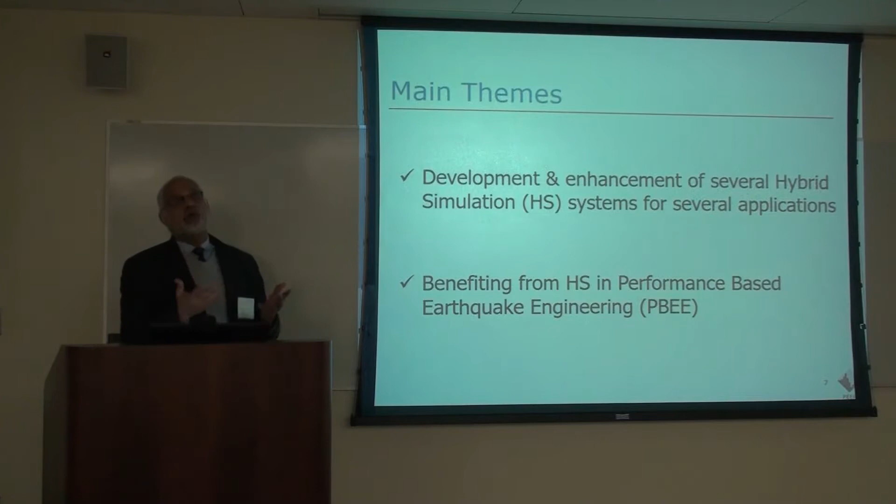And in my role as the director of PEER, as you know, and I'll talk about that a little more during the lunch. So you're going to hear me again during the lunch, but I promise it will be very short, and hopefully it will not make you lose your appetite. And I will focus on talking about PEER and what PEER does. But in a nutshell, we focus on performance-based earthquake engineering. So we try to make use of hybrid simulation in that broader context, and I'll show a couple of slides about that.

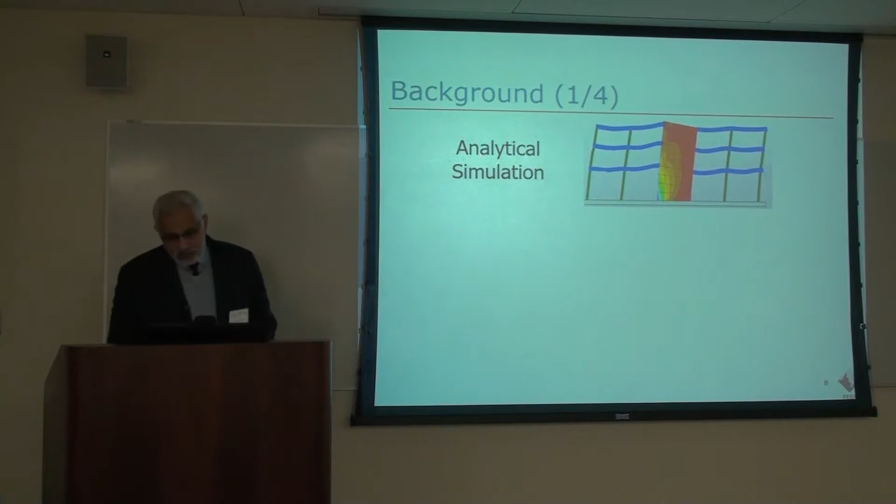So as you all know, hybrid simulation has to do with combining analytical simulation, which could be a finite element model as such, and a few components or elements of this analytical simulation may make sense to put them in a laboratory experiment. So there will be experimental simulation of physical modeling. You put the two together, you have some sort of a hybrid system or hybrid simulation.

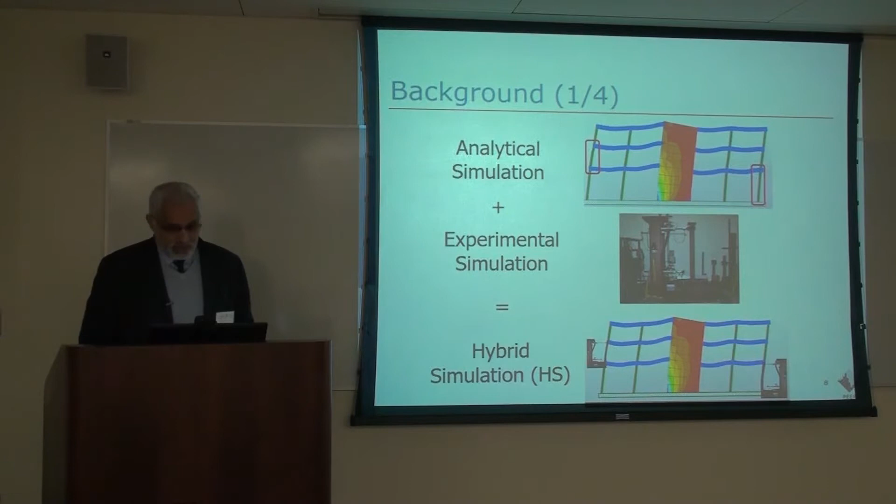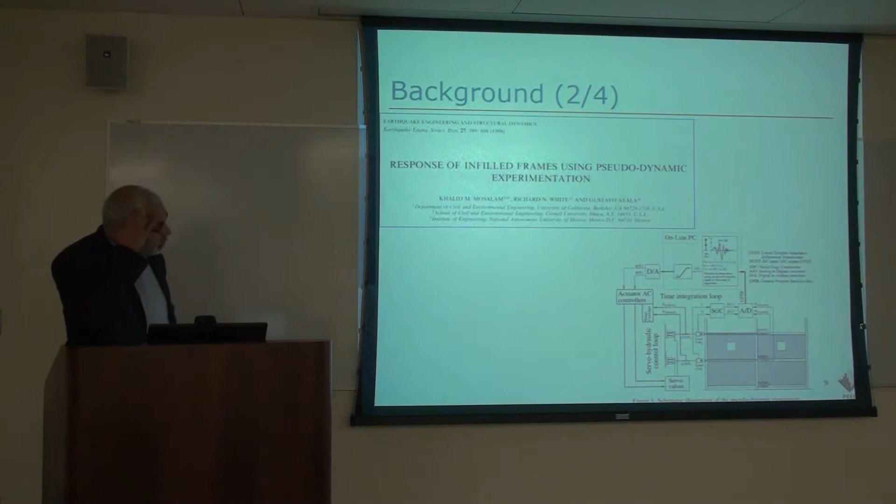So my first encounter to hybrid simulation is this paper I have written back in '98 that came out from work I did while I was still a student at Cornell. Certainly that's many years after Steve Mahin had done a lot of work already in hybrid simulation. So I was learning from all the work that was done here in Berkeley and Japan and in other places. And we looked at this system that has 2 stories. We were wondering, how do we apply lateral load to this system using actuators? Should we put an inverted triangular loading or equal load at each story?

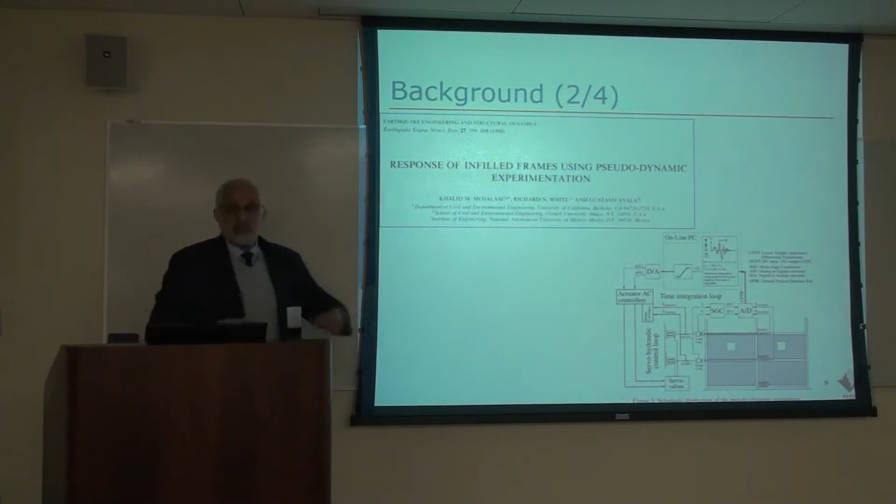Then I ran into this paper I showed you early on. Oh, there is something called pseudodynamic. Oh, we can do some analysis while we do the experiment and let the loading of these 2 actuators be decided based on a computer model that may be just a 2 degree of freedom system, which is something like this. So that's what I'm starting with. And I don't know what's going on here, but something to do with the fonts.

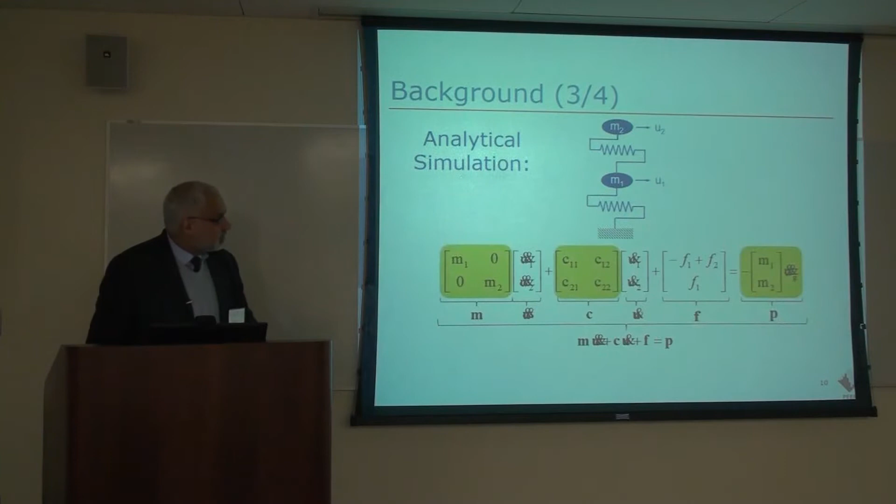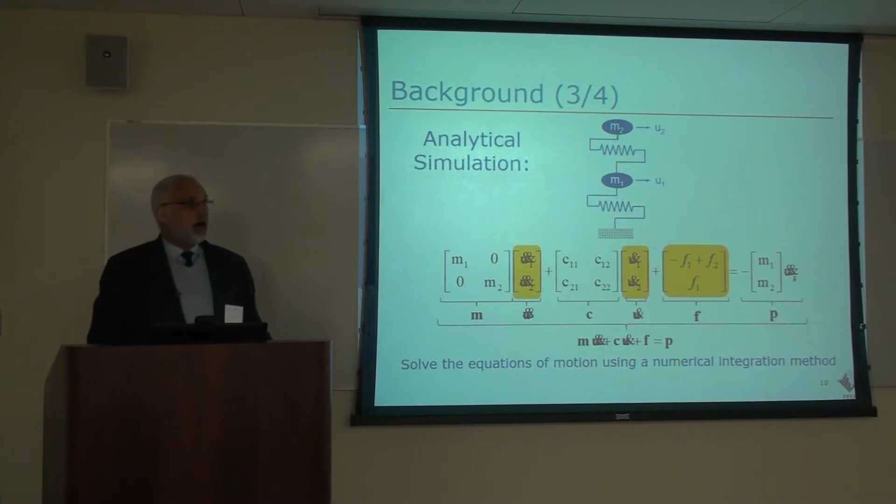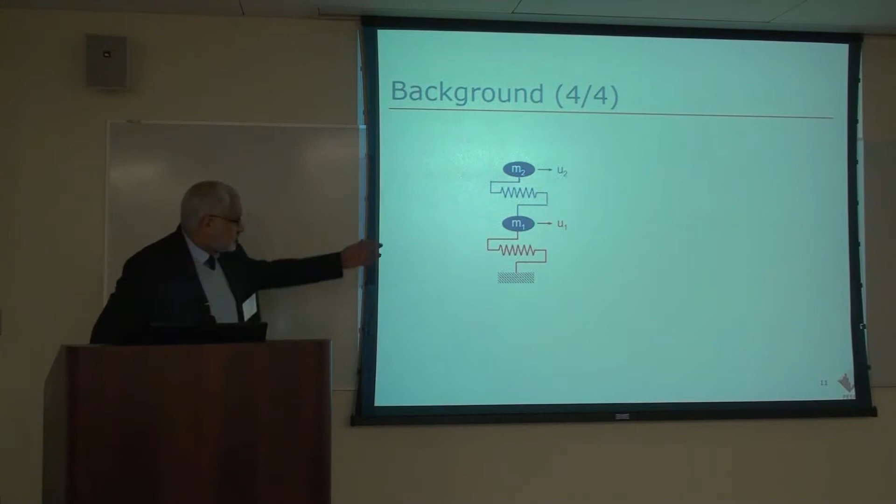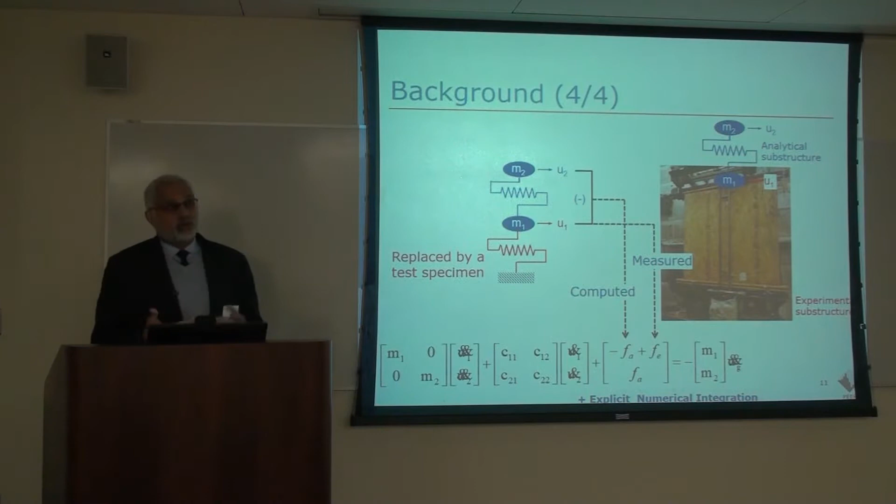But you write your governing equation of motion. Usually these are input to your numerical integrator. Usually these are what you try to compute. And you include some kind of a numerical integrator to integrate these coupled differential equations. But in hybrid simulation, maybe one of those degrees of freedom is a physical model, which is this red spring here. And in that case, you may have a test specimen that may look like this. And then you have the second story as a computer model. Then again, you're still solving the same system of equations, but this restoring force or this force feedback, part of it now is measured and part computed, right?

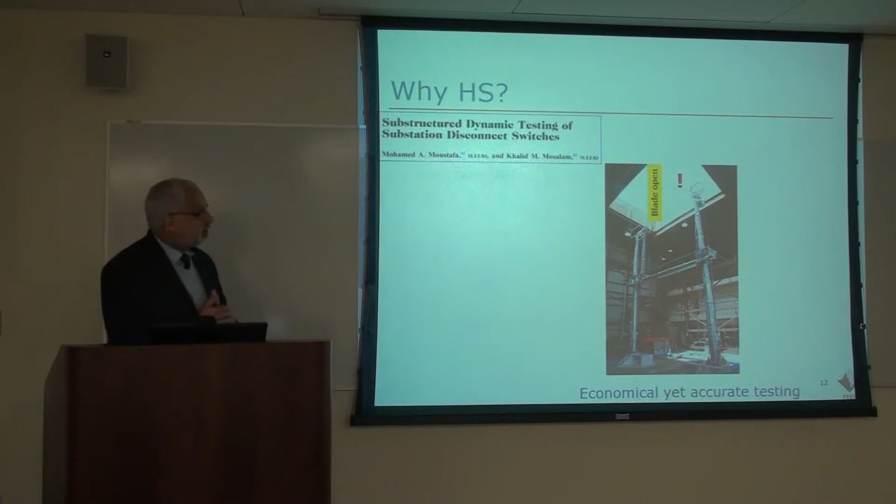So why do we do hybrid simulation? This work, I took only one example that was part of what Professor Moustafa, sitting back there, did when he was doing his master thesis here in Berkeley. And I see this as a good example. We wanted to test this 500 kilovolt electric switch, and it's too big. So either you make a hole in the ceiling of your shake table building and have somebody pay for it. That may cost several thousand dollars to be able to test something that big.

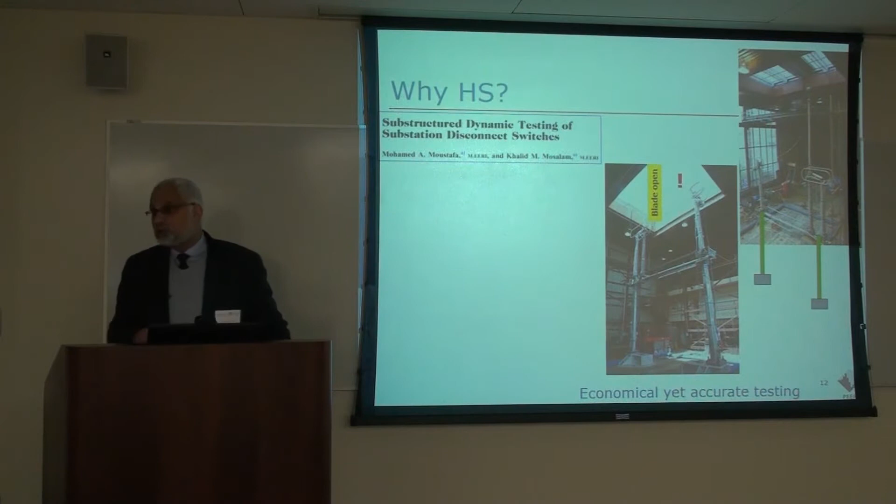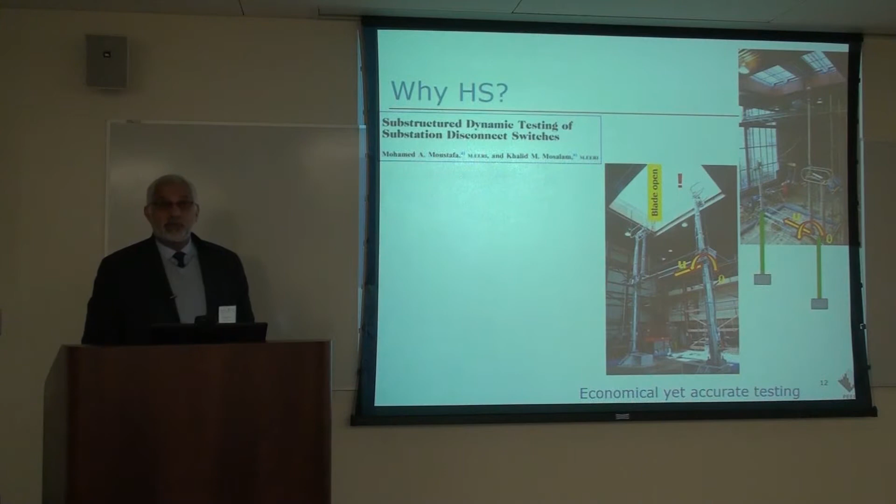Or you say, well, I can actually substructure this. I know how to model a support structure, which is just a steel frame, but the switch sitting on top can actually be brought on the table. And then if you manage to analyze this green frame while testing the switch sitting on the table, maybe you need to apply not just translation, but maybe rotation as well. But given you have a 6 degree of freedom shaking table, and we will see a demo about that tomorrow, I think, right? Yes.

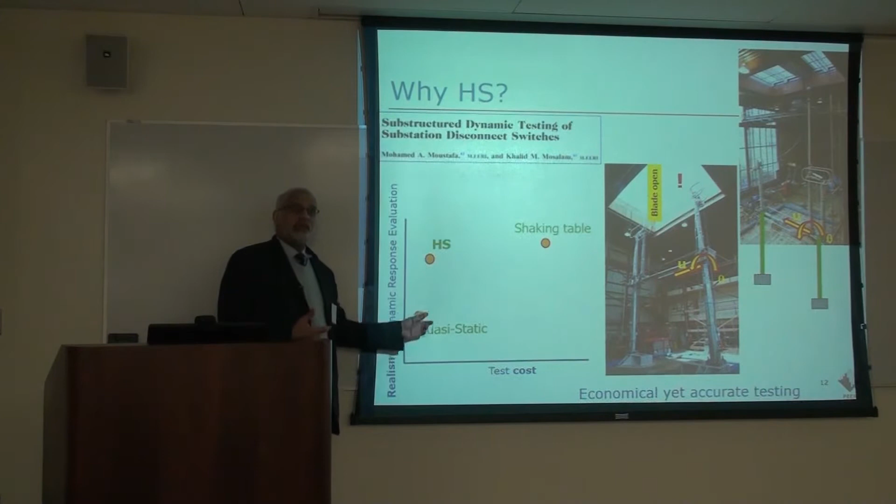So then you can actually achieve the goal of, instead of having unrealistic dynamic representation of the system by doing only quasi-static tests or an expensive shaking table test, you can actually do something in between where you can benefit from these 50 years of development of hybrid simulation that goes back to the early work of Steve Mahin, Masayoshi Nakashima, and others. So that's usually the goal, or one of the goals why we do hybrid.

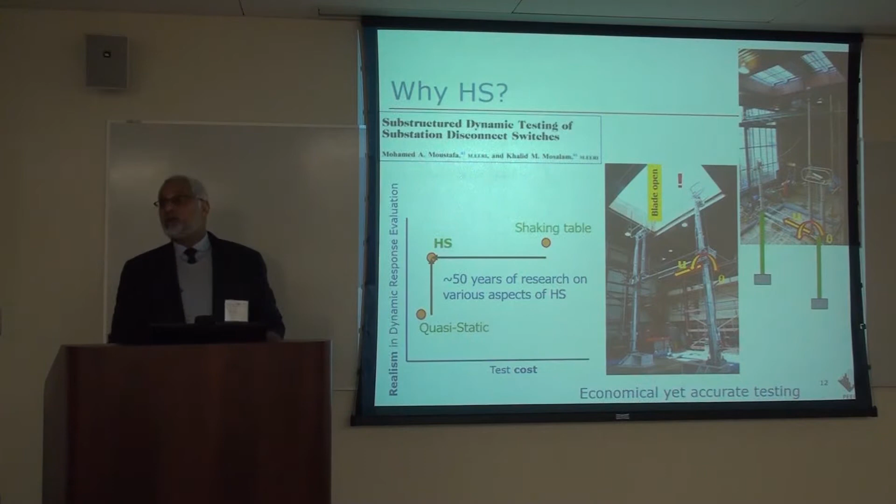There could be other goals. There could be difficulty in simulating physically the mass, or a very large structure that we cannot test, or something you cannot scale down and put on the table. There could be a variety of reasons, but that's one example why we would do hybrid simulation. So what I will show next is basically 6 applications that I was directly involved in over the years. One of them is related to this motivation I just talked about.

When we deal with electric equipment, we have all kinds of electric equipment. If you go to any electric substation, you see many types of these equipment. The class we focused on is some kind of electric equipment that may be made of porcelain or made of polymer that is hard to simulate analytically, and some steel support structure that's relatively easy to simulate analytically. So then it's a perfect problem for substructuring. Clearly the dynamics of the system is affected by the detail of the analytical model. In this case it is the support structure.

To be able to conduct a variety of tests on the shaking table of this system will be very costly, time consuming, and it will be very hard to develop some kind of qualification specs, let's say, unless you have lots of resources, maybe from MTS or from other funding agencies. A couple of other reasons: some of these posts are made of polymer, which requires paying attention to the rate of loading because they are sensitive to the rate of loading, which mandates doing some kind of real-time hybrid testing. And these are distributed mass.

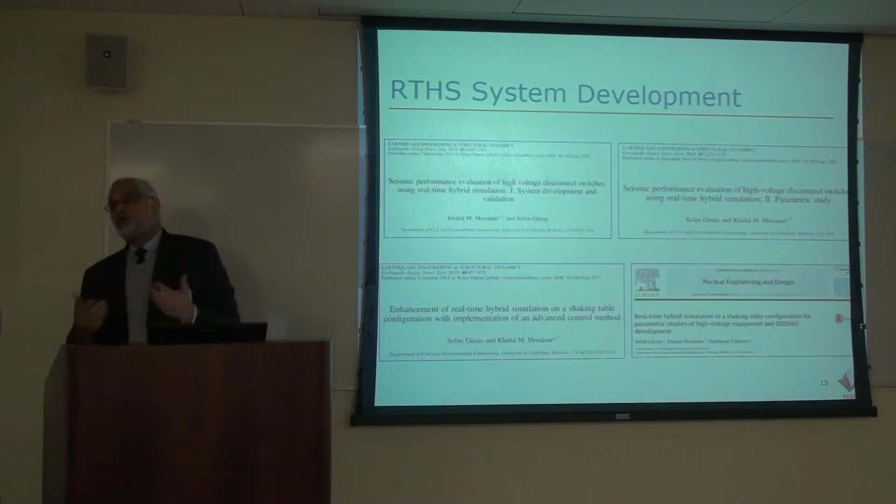I was fortunate enough to work with several people on these, mainly Selim Gunay, who will be talking a lot today and tomorrow, where we try to develop a system that can actually focus on testing these kinds of electric equipment because the need was there. One of the things that he will talk about is the use of three-variable control that's developed by MTS, when we wanted to test a variety of equipment that go from flexible to very stiff, so you cannot just control displacement, maybe you have to worry about controlling velocity and acceleration.

So the early development of this, and it's kind of a good segue into how hybrid systems are put together, is you combine some kind of a data acquisition system with a computational platform, which could be programming your DSP card or having some kind of an interface to MATLAB or some other computational platform. You have a straightforward controller and a little shaking table here that we have on the Berkeley campus.

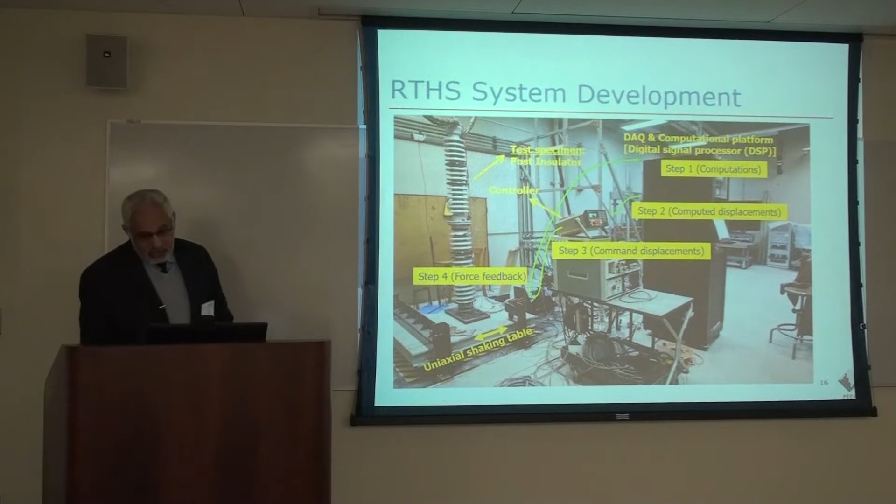So the first step, you do some computation. You pass the computed displacement, in this case, to your controller. You let your controller do its magic. It goes to the actuator that runs the table. You measure the force feedback, and you keep doing that in a loop. The challenge is to be able to do that quickly and efficiently, so maybe 1 millisecond or something, which is your time step where you have to do this loop in a fast way.

And there are so many techniques on how to do this fast and efficiently. It all depends on how big your computational model is. It could be a single degree of freedom, a discrete system of degrees of freedom, or could be even a continuum. So I'll show you a few examples of that.

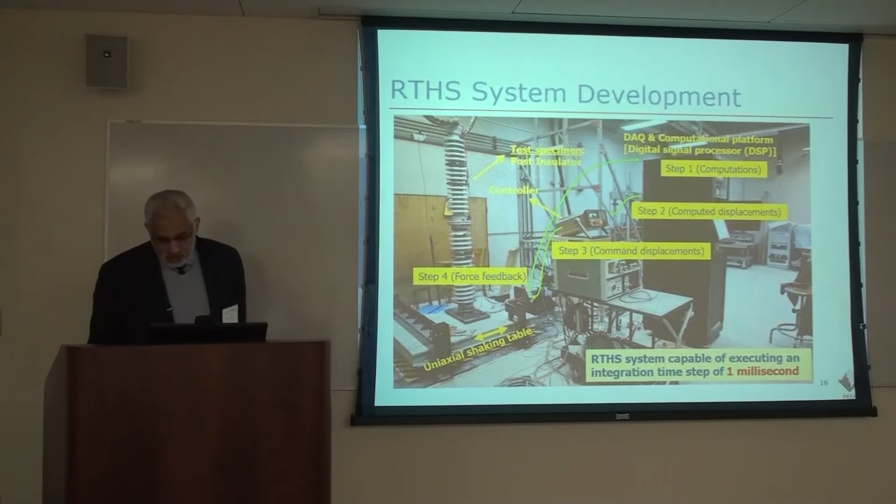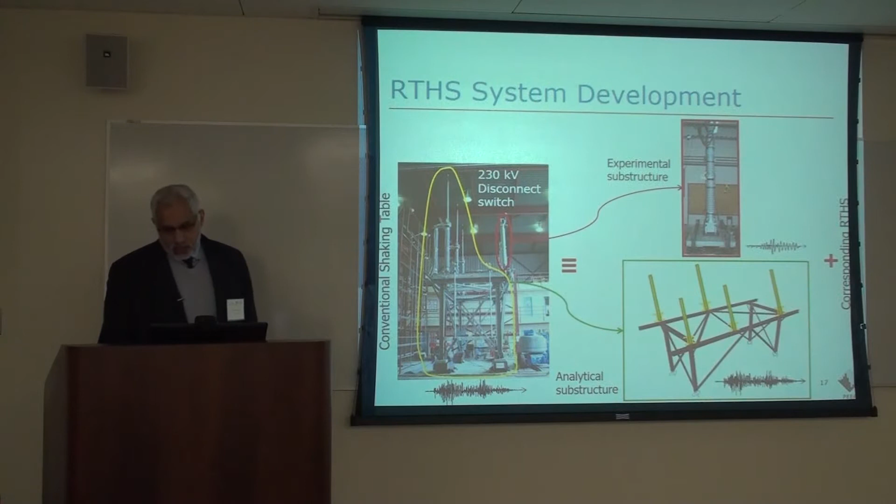So if we go back to the problem we have interest in, looking at this 230 kilovolt switch. So this is a test we did on the shaking table a few years ago, but you can take the support structure, put it in SAP or put it in OpenSees, and you have maybe one of these porcelain insulators sitting on this 1D shaking table, and you make these two talk to each other. You are faced with some delays because your computation cannot be fast enough, so there may be a situation like this.

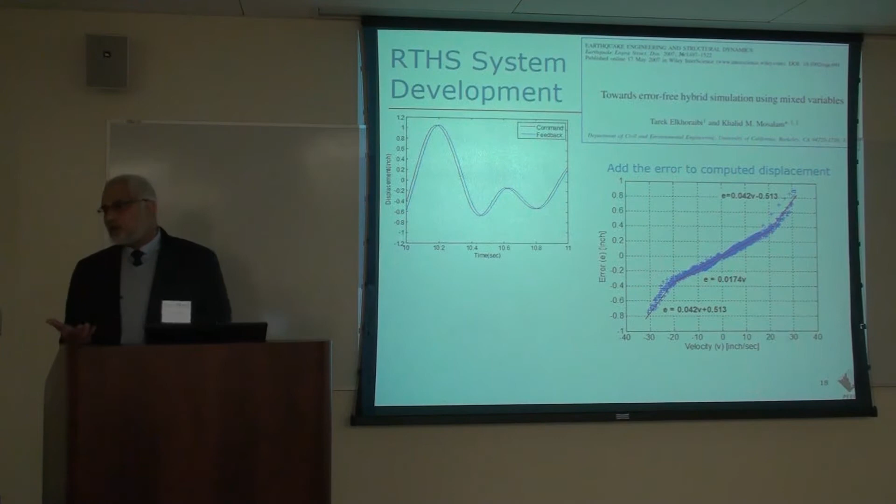We have done some old work on that, and we developed some feed-forward compensator. There are so many other techniques, but here I'm just showing examples I was involved in. This doesn't mean that's the state of the art. There is great work out there. I'm just taking liberty of showing you things I have done myself. Selim also will talk about some recent work we have done in delay compensation.

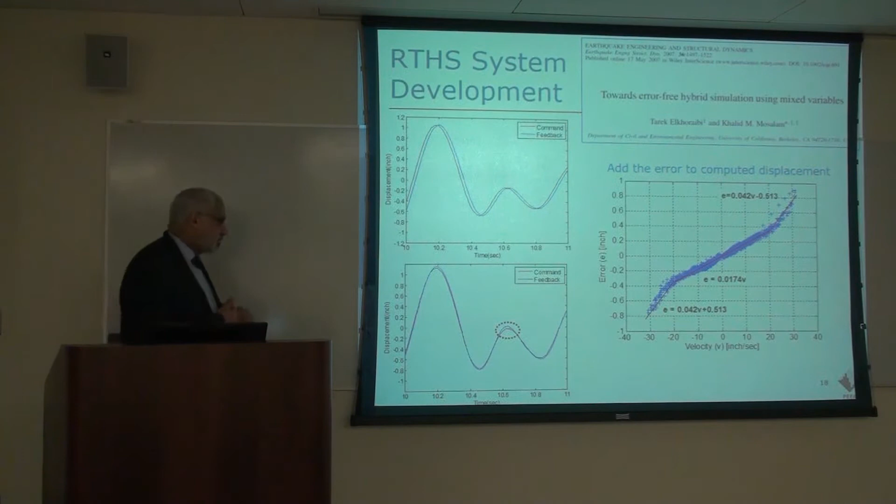This was a very simple compensator where the error is related to the velocity of the actuator. It works very well, however, at the peaks here, at peak displacement, where velocity by definition is 0, you will not have any feed-forward compensation. So the error will persist, but maybe other techniques can take care of that if this was a problem.

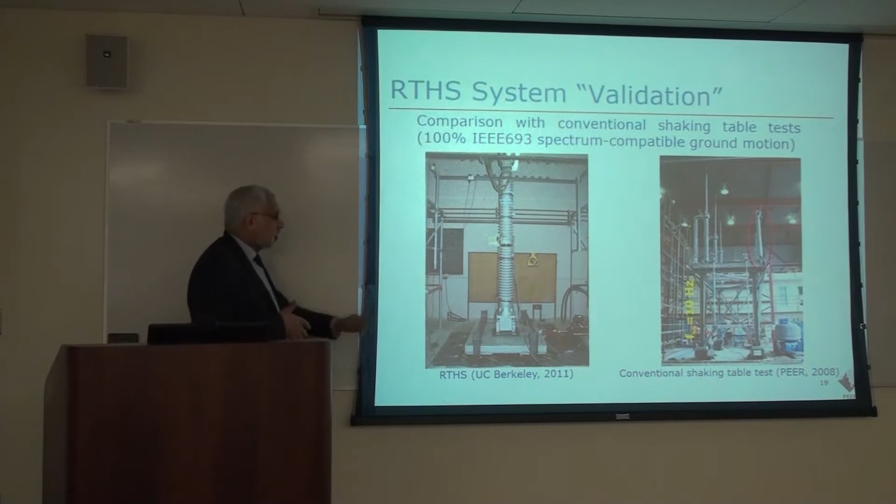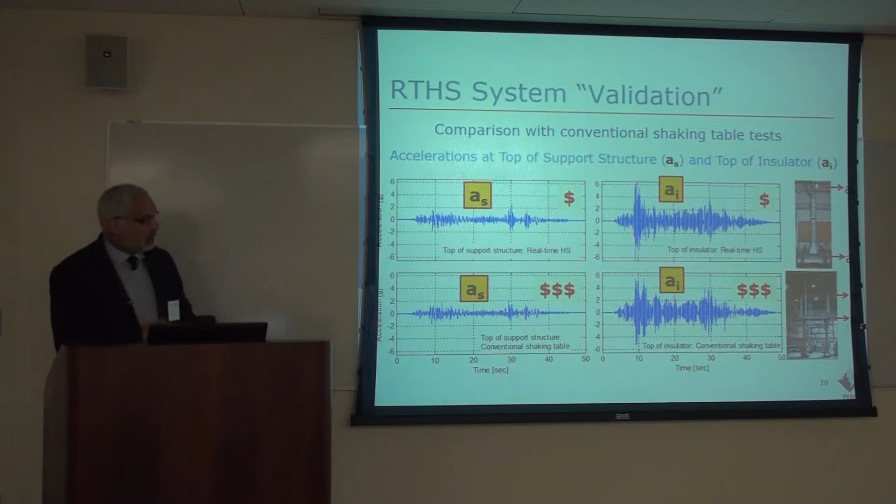Over the years, we have done many validation tests just to gain confidence in these kind of methods. So again, going back to the shake table experiment and its corresponding hybrid simulation version. If you look at this from far, the top two plots here correspond to the hybrid simulation test, which if MTS is going to invest on that, is going to invest very little. But if they want us to do more shake table tests, it's going to be more expensive. And it depends how you weigh.

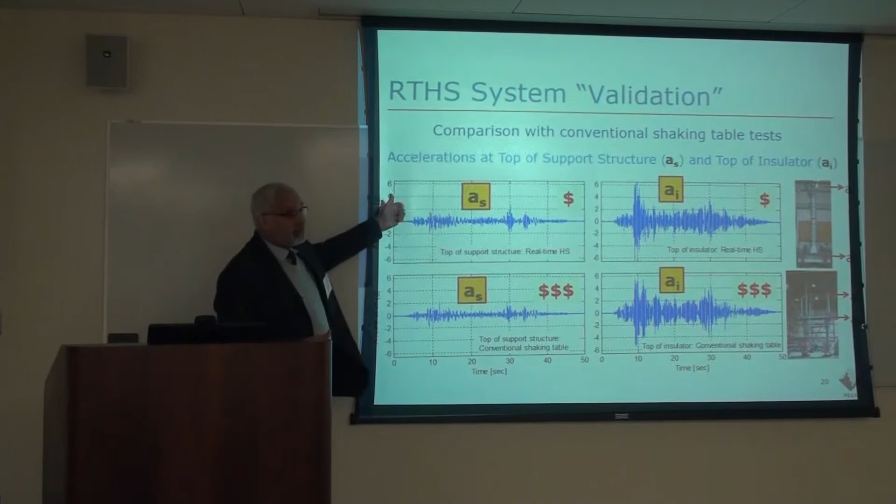If you go back to this first motivation figure, it is the compromise between cost and accuracy. And you may be content that it's good enough if it's done cheaply versus something that's more expensive. One thing that's interesting in these kind of tests is, one would say, well, if you are that good in doing simulation, why don't you just do the whole thing in the computer, right?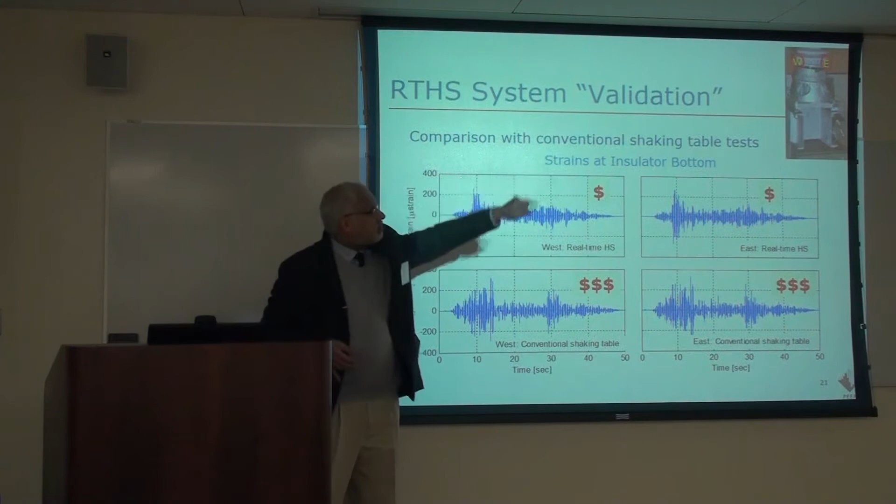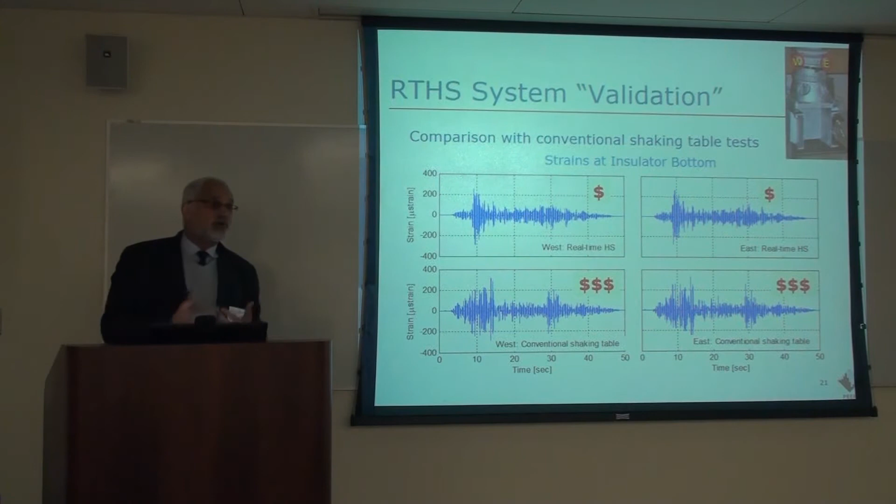Which is certainly possible, but when you look at the base of these posts, it's a highly disturbed region. So if our interest is to look at strains at these locations, as we all know, finite element modeling will not be very accurate in these regions if you're looking at the strain level, because that's what's going to trigger the fracture of this porcelain. So if you are looking at this kind of local measurements, you have no way but to test these details or these critical regions.

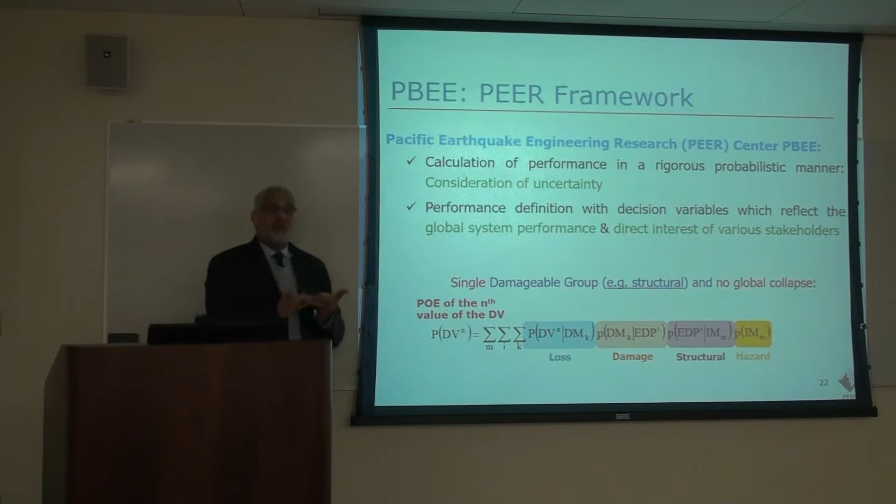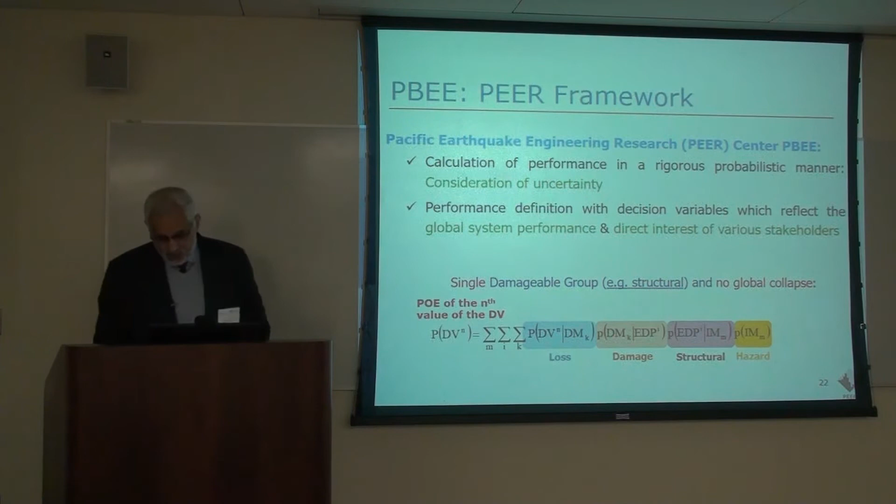So this is great, but now in the bigger context of PEER, where we focus on performance-based earthquake engineering, where we go all the way from hazard to loss estimation, where does hybrid simulation fit in this grand scheme of things? The way we break down the performance-based earthquake engineering framework is to do hazard estimation, structural modeling, damage assessment, and then loss estimation. So hybrid simulation is basically where the structural box comes in. If you don't know how to model something purely in the computer, this is where hybrid simulation can fill in the gap.

So in the larger context of performance-based earthquake engineering, the idea is to go from engineering demand parameters, like peak displacements or peak strains, versus, let's say, varying the stiffness of the support structure. Why can we do that? Because the support structure is modeled in the computer. So it's very easy to put braces or isolation or do whatever. So this is your parameter, just by varying your computational model. And this could be what you measure, whether it's at the connection where you have your strain gauge, or the maximum displacement at the top.

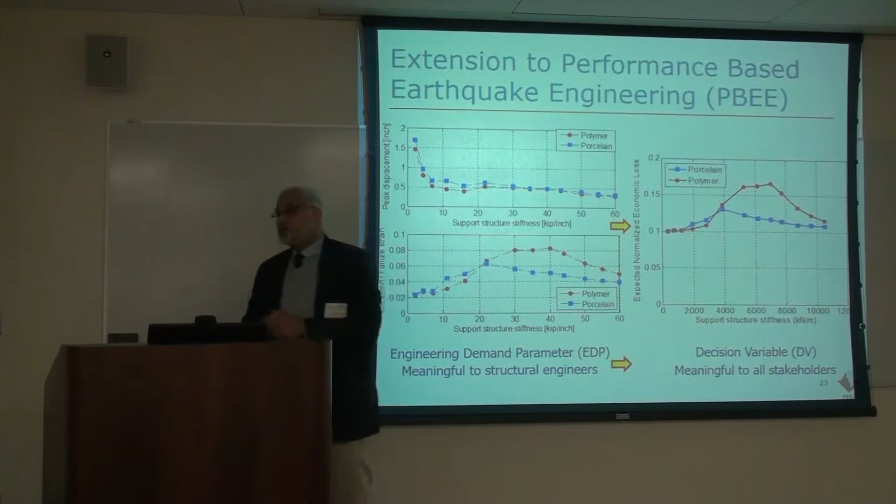So here is a mix of engineering demand parameters that come from a hybrid simulation. The idea at the end of the day is to convert that to some kind of expected losses. So you go back and look at where this equipment is. It sits in an electric substation with a particular hazard for this region. This is a particular substation in San Jose. And you start looking at what leads to losses that this substation may suffer in the event of a magnitude 7 earthquake.

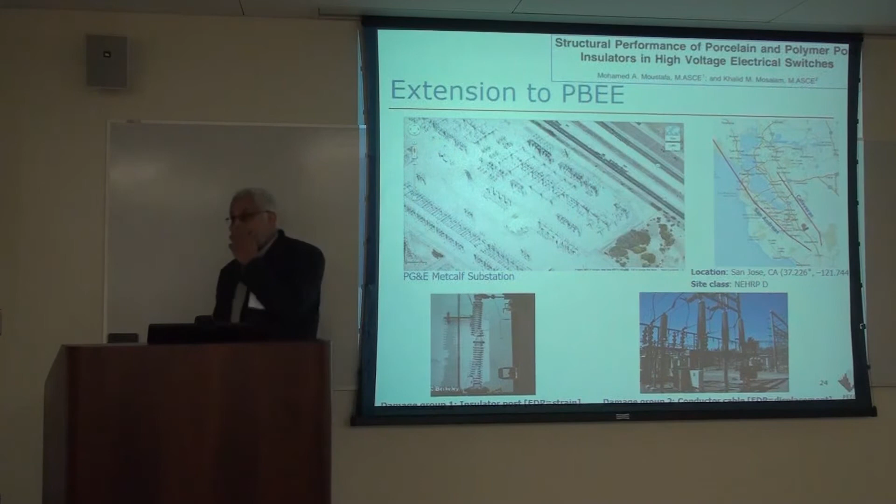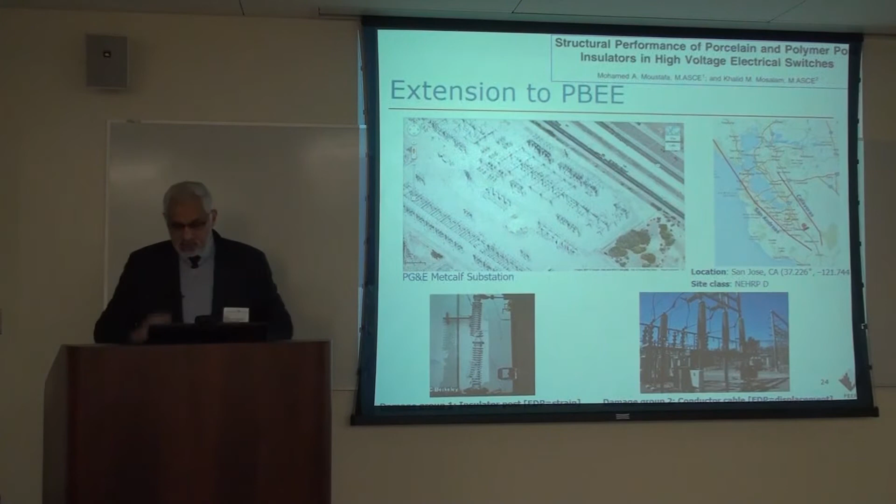So you have two types of losses that may happen. The bus may break because you have lots of deformation at the top of the equipment, or you may have fracture where the whole post may break. So you have two kinds of engineering demand parameters: something related to the strain, because usually fracture is triggered by exceeding some fracture strain, or the deformation where the equipment may start banging against each other.

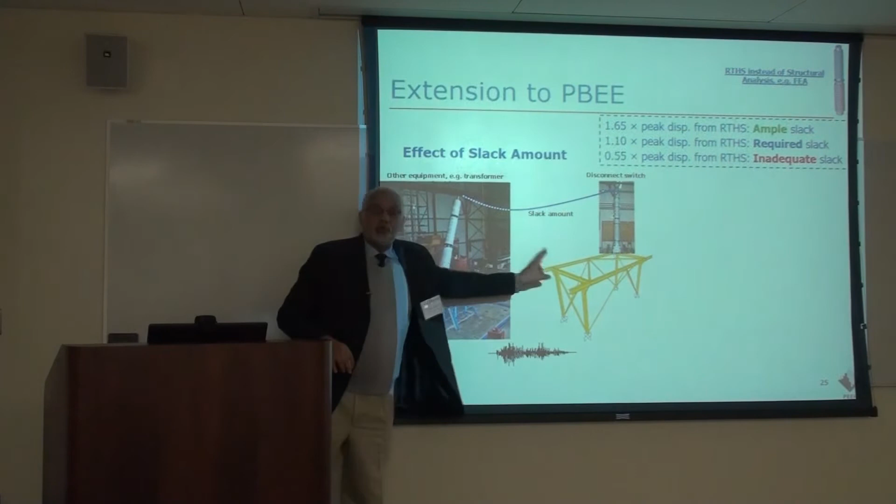So that opened the door to even more use of hybrid simulation. You may be able to model two pieces of equipment with the conductor bus as either a physical specimen or a computational specimen, and you can start looking at design parameters, telling the designer of this substation how much slack of the conductor cable between the equipment you need.

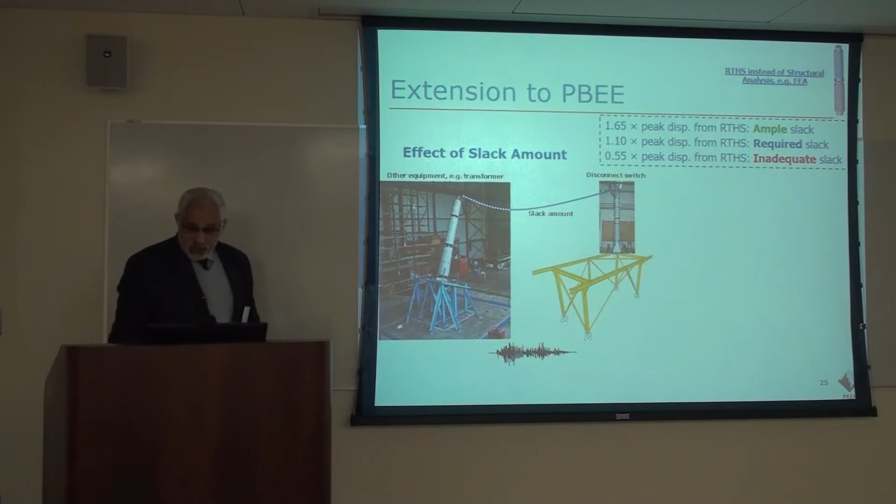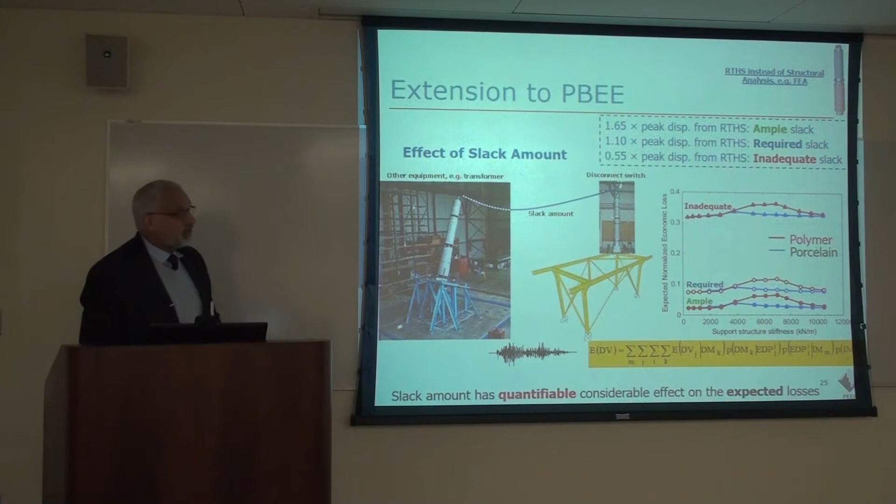So there is a variety of results you can get, like for inadequate or required or ample slack. You have different types of losses, and you can design your system as such. So I'll go very quickly.

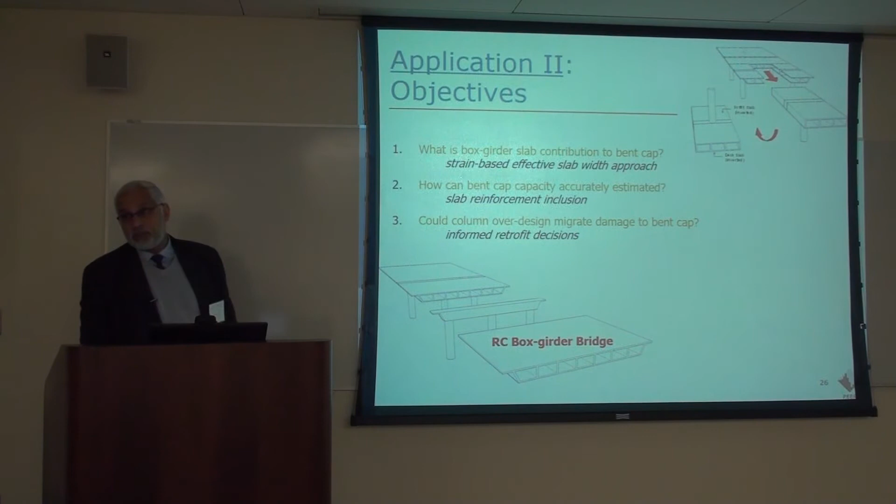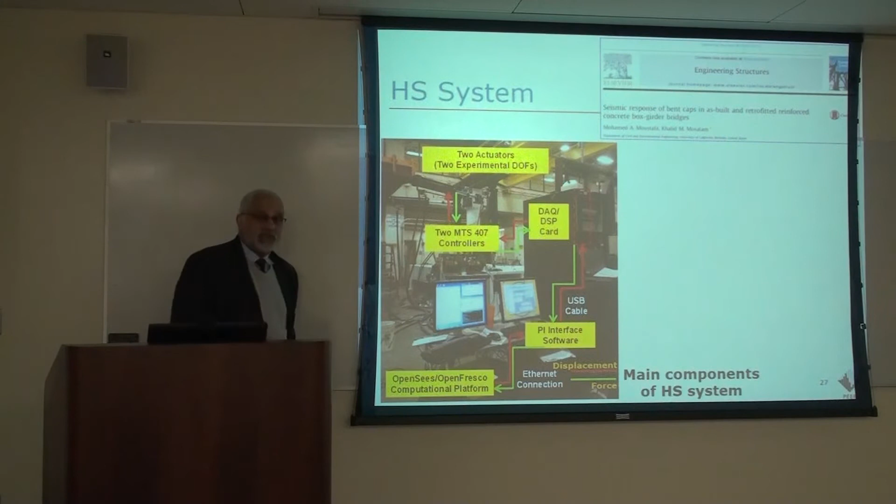Here is an example of using hybrid simulation for a box girder system. That was the work of Professor Moustafa back there on his PhD, when we wanted to look at these kinds of systems, and we had to develop a system that makes use of the combination of OpenSees and OpenFresco, and you will hear more about that, such that this system can be developed and deal with these kinds of problems.

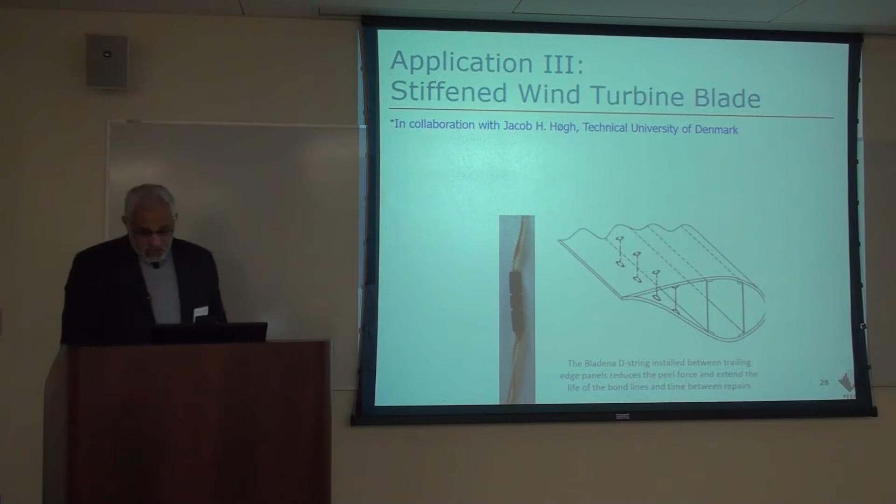We also had a study that looked at turbine blades. In a turbine blade, you have the blade and then you have a stiffener. And people were interested to look at the influence of this stiffener in the tearing of the edge of the blade. So this is a perfect problem for hybrid simulation, because basically you can model the blade in a computer,

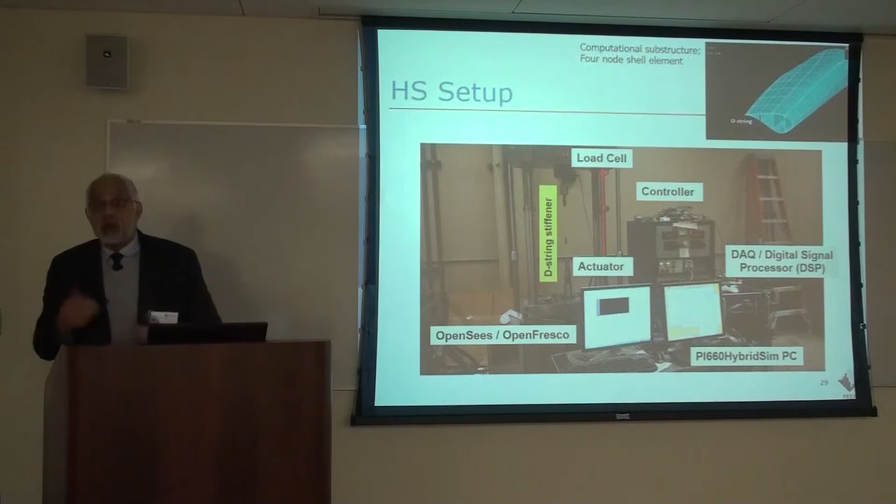you can use ANSYS or whatever, and just the stiffener is tested physically, because the stiffener is made of viscoelastic material. Maybe it's not easy, maybe it's even proprietary, and the manufacturer will not give you the properties of this. But they are willing to give you a piece to test. So you just put it in a hybrid system, you make it interact with your computational model. You can do similar things. Let me just go quickly here.

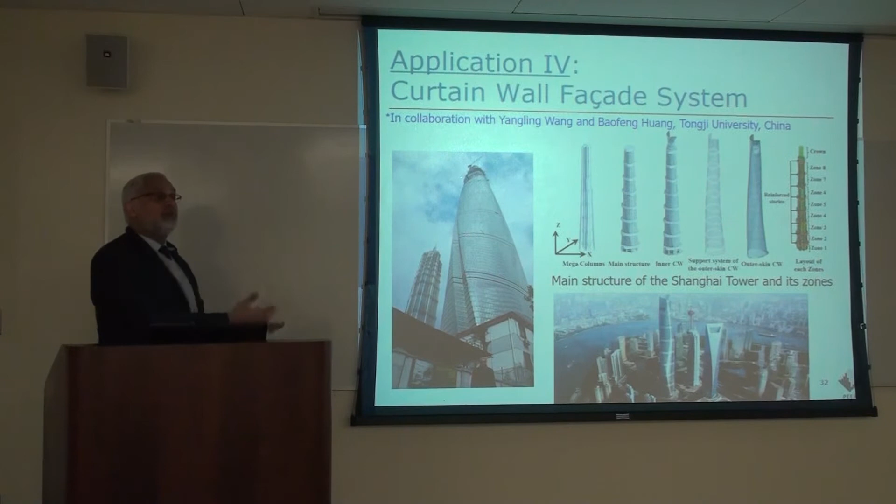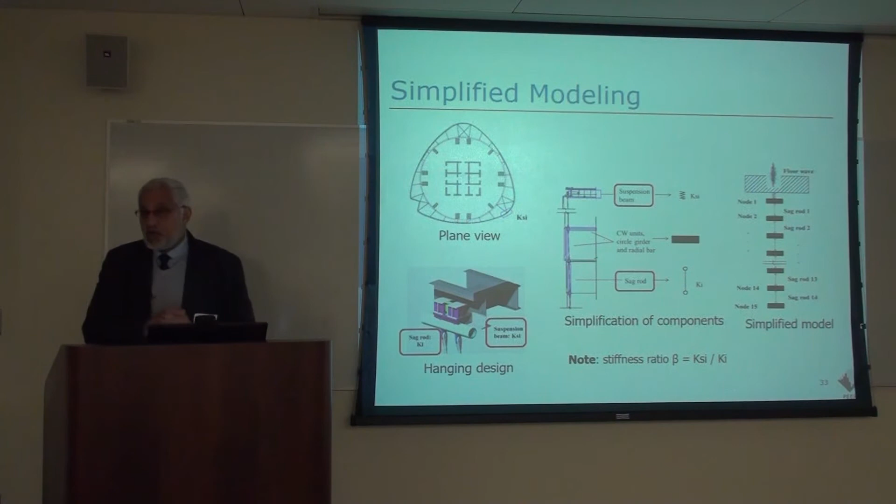This is a project we had in China that was looking at the curtain wall of the Shanghai Tower. The Shanghai Tower curtain wall system is a very interesting system. It consists of very large glass panels hung by cables. And if we want to test the safety of this system, we can think of the glass as being simulated in the computer, while the cabling system, similar to the stiffener of the turbine blade, is tested physically using the same kind of hybrid system.

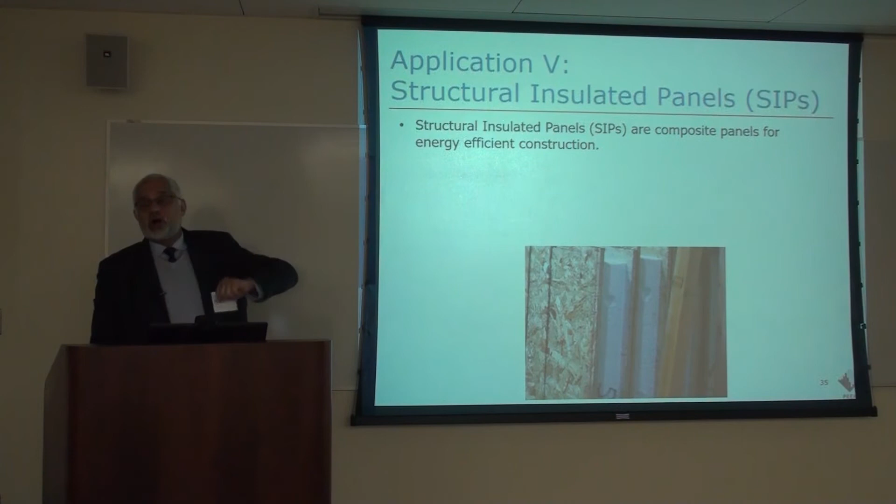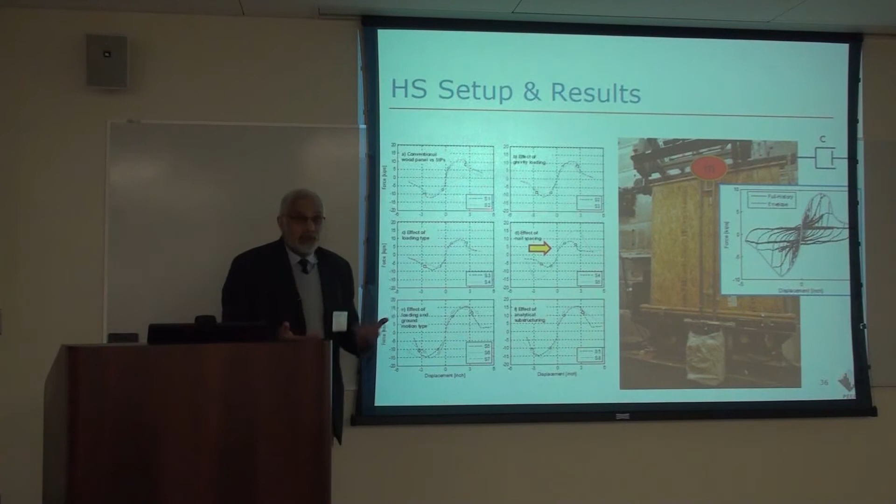You can also look at structural insulated panels. That's actually the first example I showed you where we have this 2 degrees of freedom, where this panel is made of a skin with styrofoam in the middle that may not be suitable for computer modeling, but maybe a 2-story system. The second story is modeled in the computer, the first story is tested in the lab. So we also had this kind of system, and you can vary a variety of things where you study the problem with realistic loading that comes from the hybrid simulation.

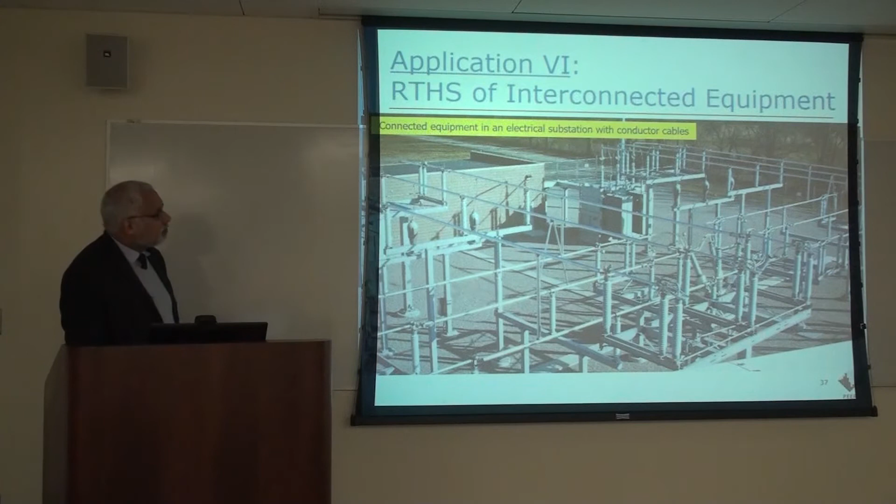Going back, this is the last example here, going back to this interconnected equipment. Why this is important as a last example: because this substation during earthquakes may suffer something like this, and we can only speculate that one piece of equipment failed and then started pulling on the rest, right? So you really need to study the problem in a holistic way.

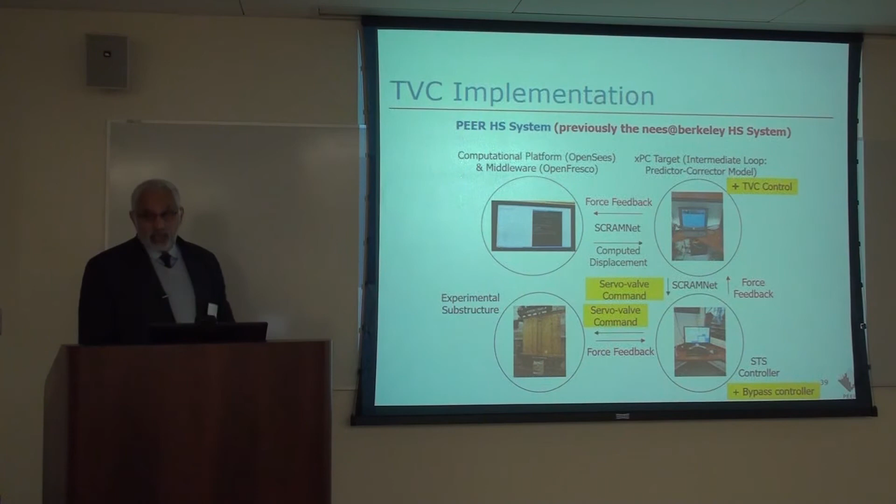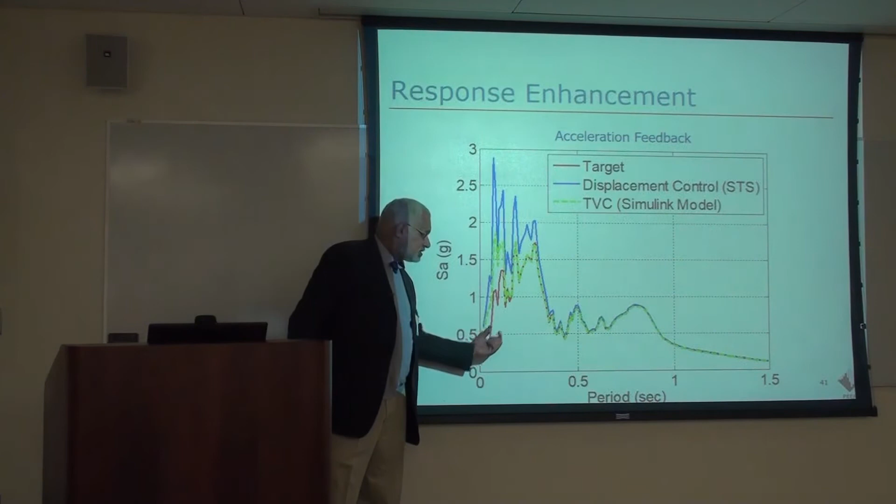This is the system we had for NEES at Berkeley a few years ago, and we will hear more about the inclusion of the 3-variable control in the context of hybrid simulation later, because we were interested not only in the high frequency or the low frequency, but somewhere between the two. In this range, because we wanted to test a system like this where you have 2 shaking tables connected by a conductor cable, and underneath each of these equipment you have a different support structure.

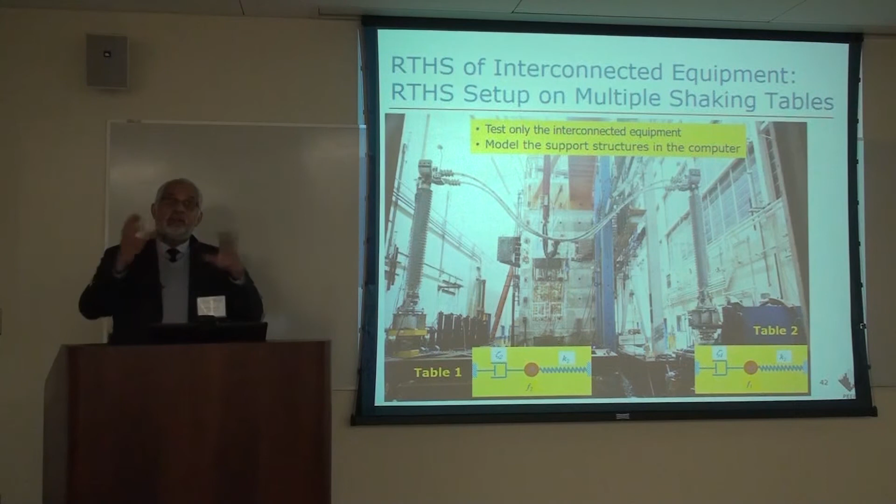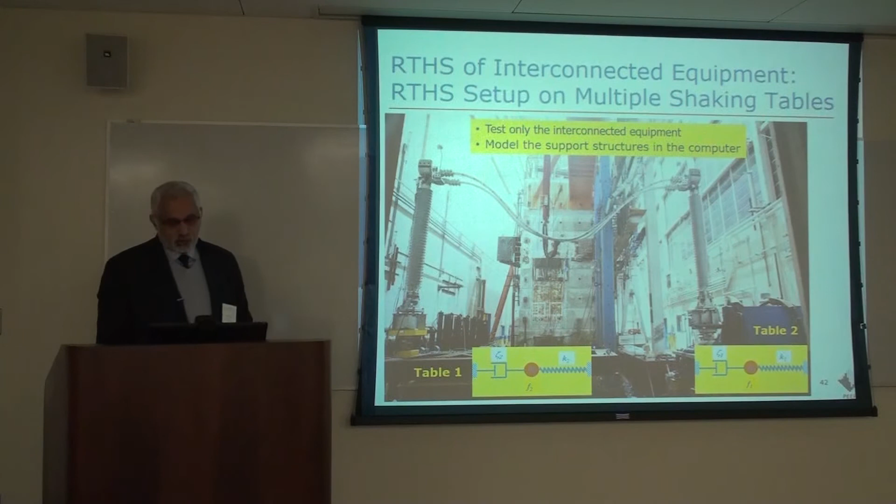First, why do we need 2 tables? Because the support structures are different. Even if the ground motion is the same, the amplification will be different. And then some of these equipment are very stiff, some are flexible, so you need a very advanced controller to do that. And you can get interesting results that you can use.

Just a few slides about future directions, very quickly. One is the theory. We have done some work on that, where you go back to basics and say, well, what are we really doing? We have a domain that we decompose. Half of it goes to the computer, the other half goes to the lab. What happens at the interface? So we have been studying this problem, but we haven't gone far enough. So I see a future in this direction.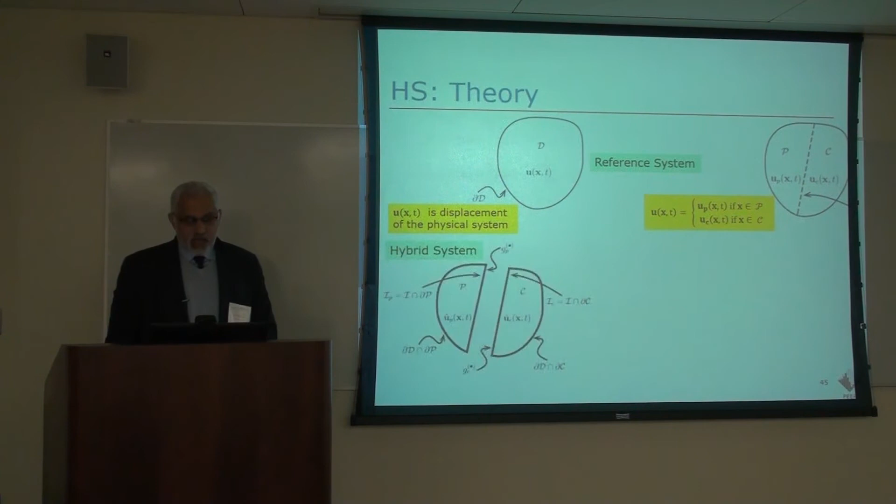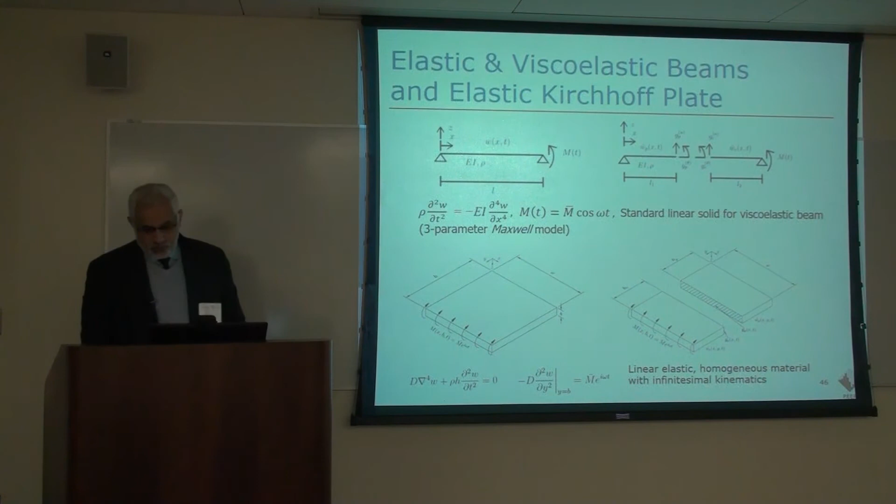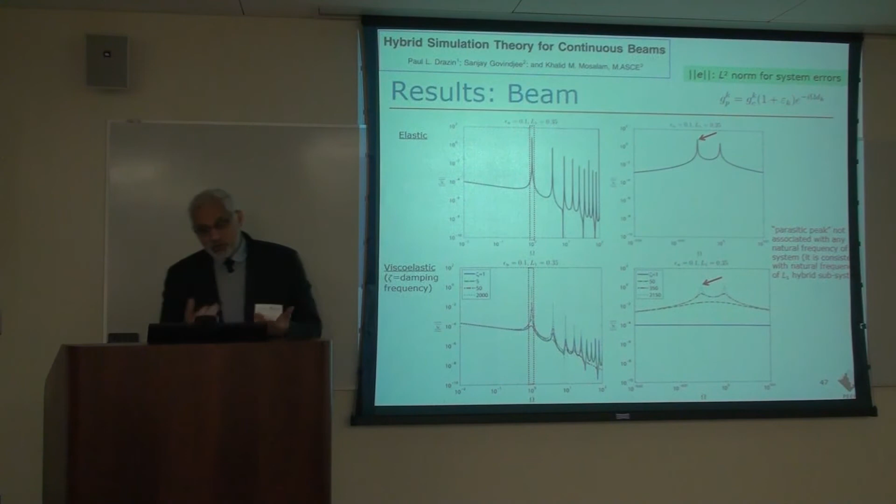So here is an example of going back to the basics of beam theory, going back to the basics of plate theory, right? And given we have a closed-form solution, you can start to look at the trajectory of errors. You can start looking at why spurious modes may come in because of this artificial separation. So that's some work we have started, but we still have room for improvement for plates. The same thing where you start seeing vibrations happening, not because of the system, but because of the subsystems.

And the mismatch that happens at the interface that is caused by your setup is something that needs to be studied. The last example I will show you is how to use hybrid simulation in a multi-physics problem.

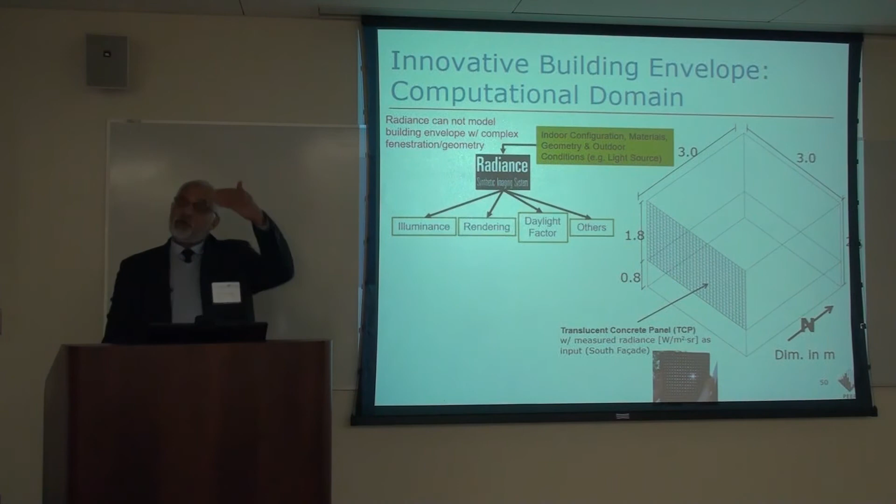So here is a project we have that looks at energy efficient buildings. So we were interested in developing energy efficient facades. So this doesn't have to do with earthquake engineering or even loading. It has to do with lighting. So there are computers out there that can analyze the amount of light indoors that we can make use of. But if you have an innovative facade, like translucent concrete or using fiber optics or something like that, you have to test these things physically.

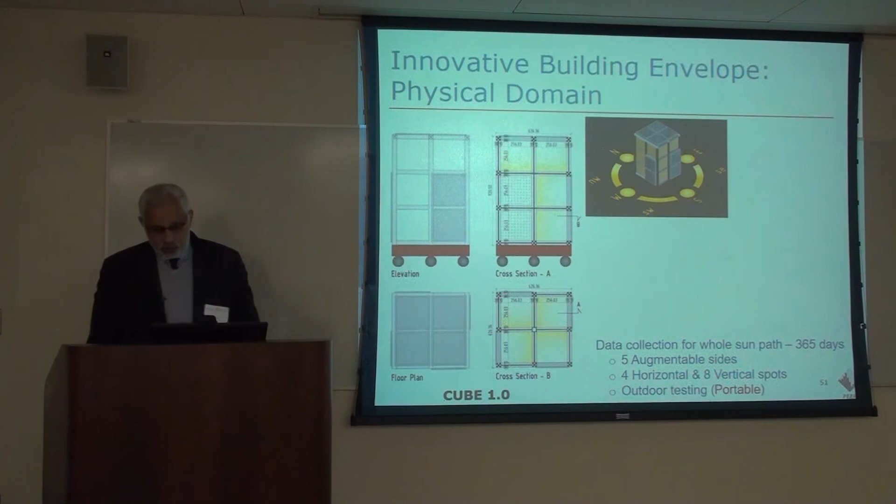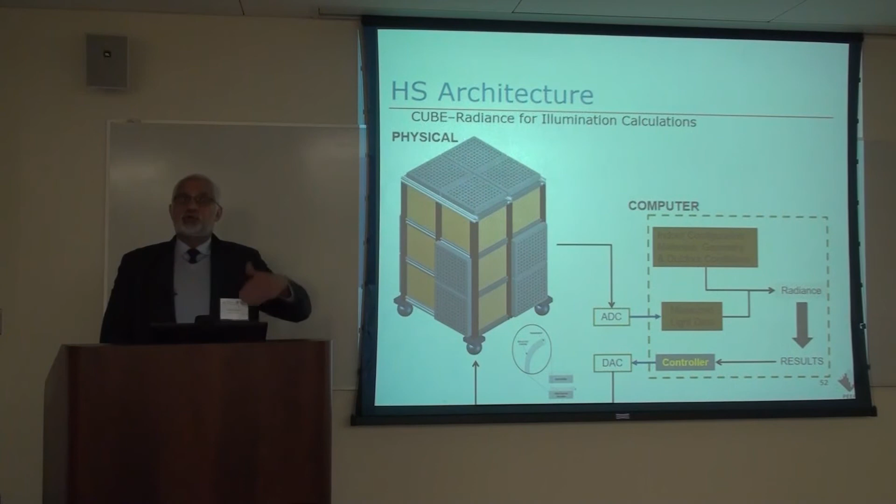So Alex sitting back there will talk to us tomorrow about how we mix physical measurements for lighting together with computational modeling of indoors. And he developed a few things in his work where you combine an outdoor device, which could be what we call a cube, which may have this innovative facade, but this is too small to model the indoor light distribution, so he may couple this with some indoor modeling to study a variety of features of the amount of light coming in and then controlling shades or things like that.

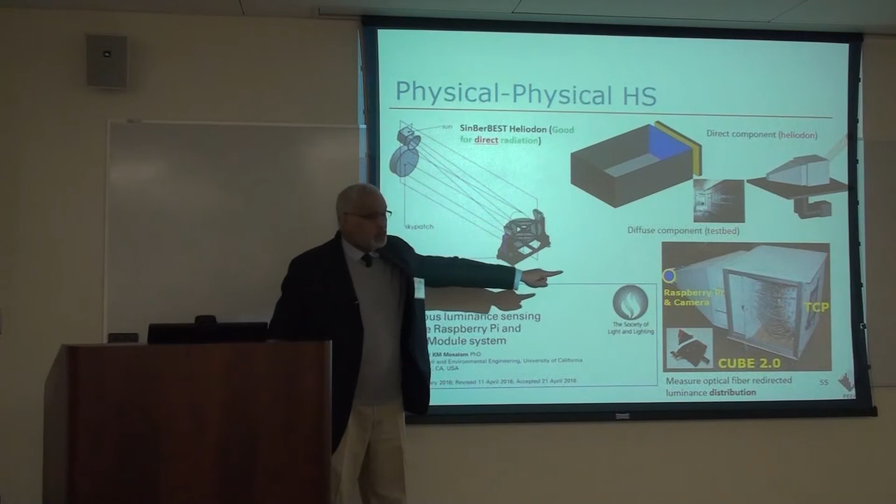So in the interest of time, I will just skip this. I will just mention that this would be your lab in this different physics problem, which will study what happens with light coming through this innovative facade. This TCP here is a translucent concrete panel that may be talking to another computational platform, and there is back and forth communication. Or maybe talking to another lab to study the problem in a holistic way.

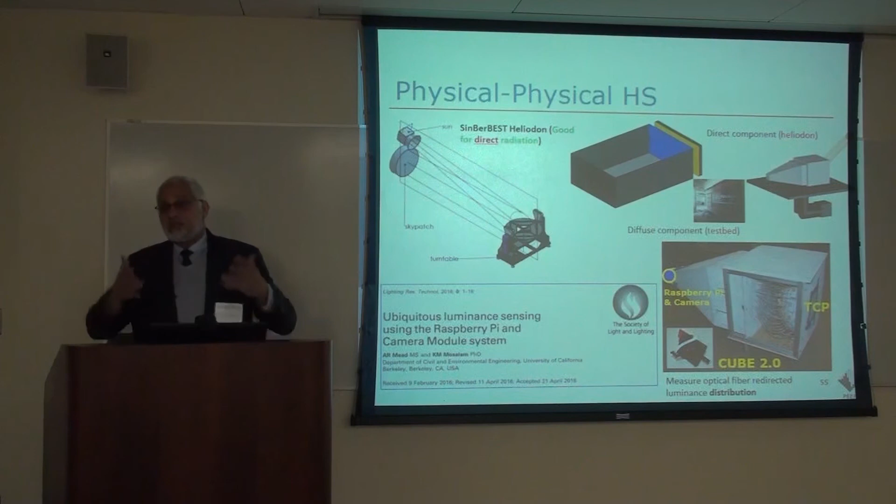Because light has two types, either diffuse light or direct light. So you may study the diffuse light through this system. You may study the direct light through a heliodon system that architects use. So it will be a physical hybrid simulation.

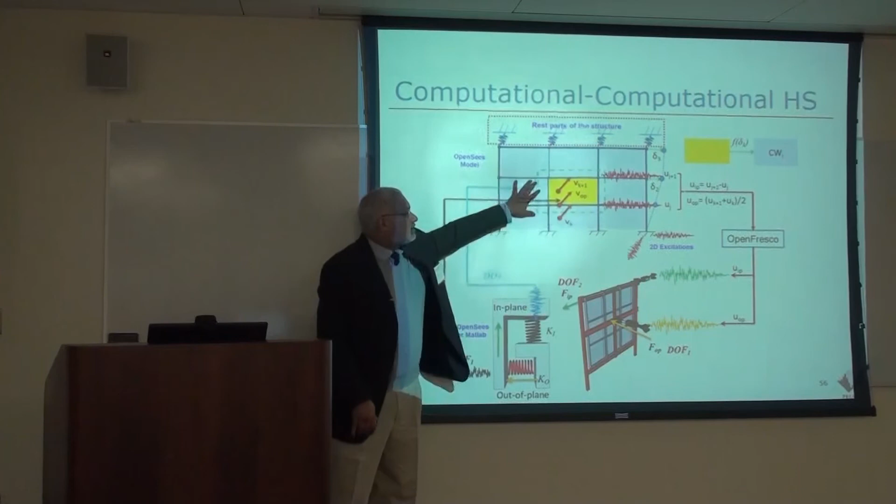My last slide is computational hybrid simulation, something that Andreas worked on, where you can use OpenFresco to connect two pieces of software, where maybe this model is suitable for MATLAB, while this model is suitable for OpenSees. So you can study glazing together with steel framing, let's say. So this is my last slide. It is just a few concluding remarks.

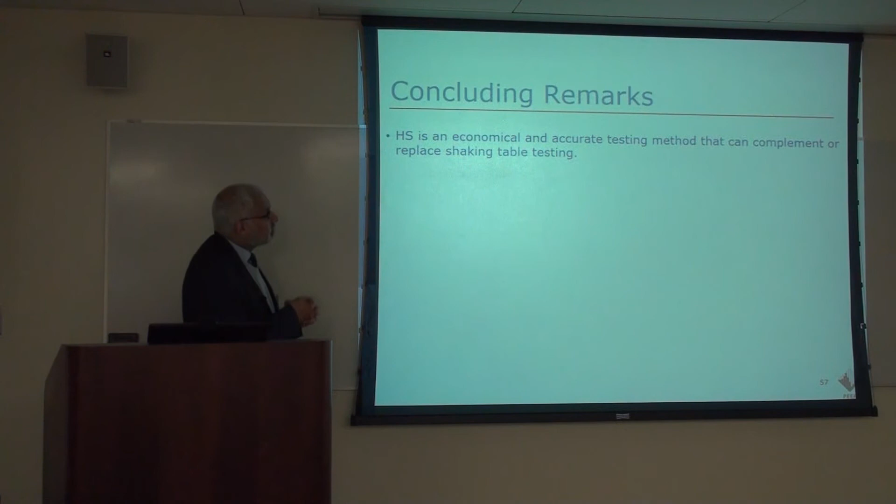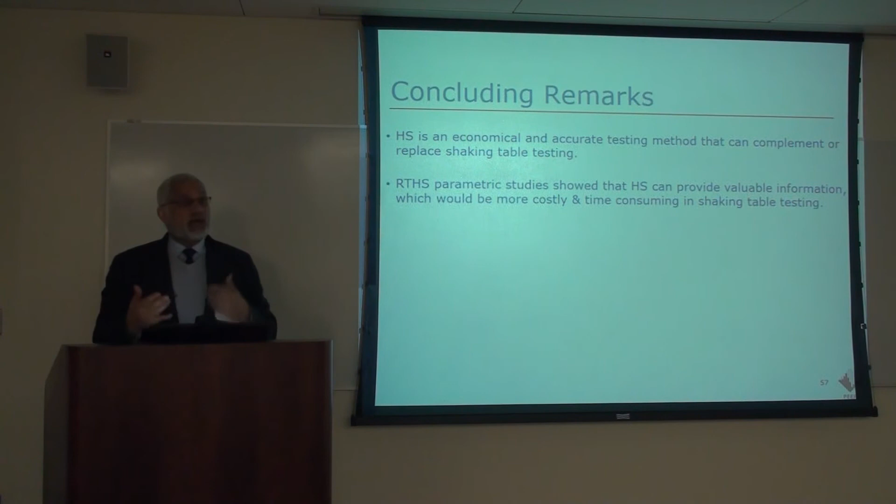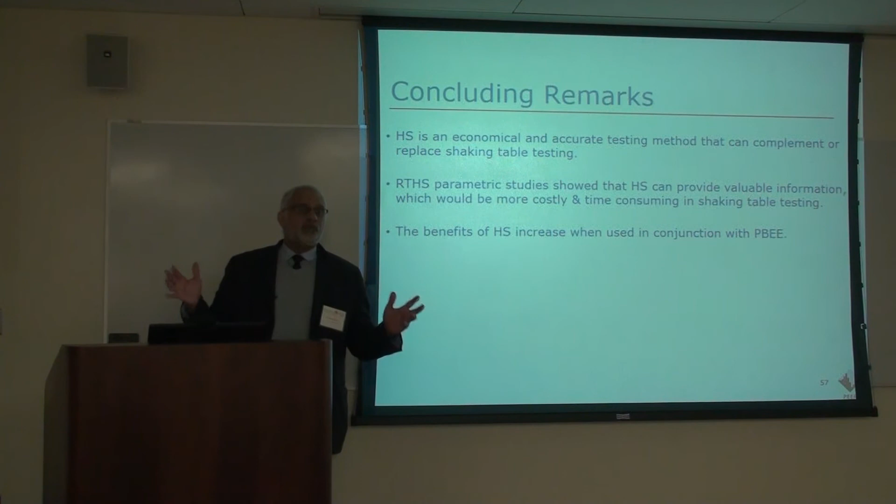Hybrid simulation is indeed an economical and accurate testing method that can tackle a variety of problems. Real-time hybrid simulation parametric studies can actually be conducted in an efficient way without the need of very expensive tests on a shaking table. The benefits of hybrid simulation can really be seen if hybrid simulation is put in the larger context of performance-based earthquake engineering. Hybrid simulation is a very convenient way to look at a variety of real engineering problems where you can relax constraints of the scale, constraints that we may face if we want to physically model the entire system.

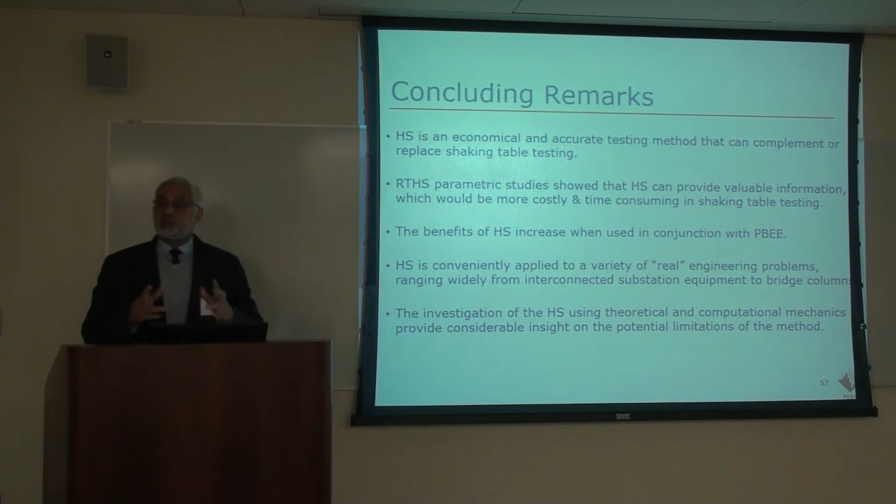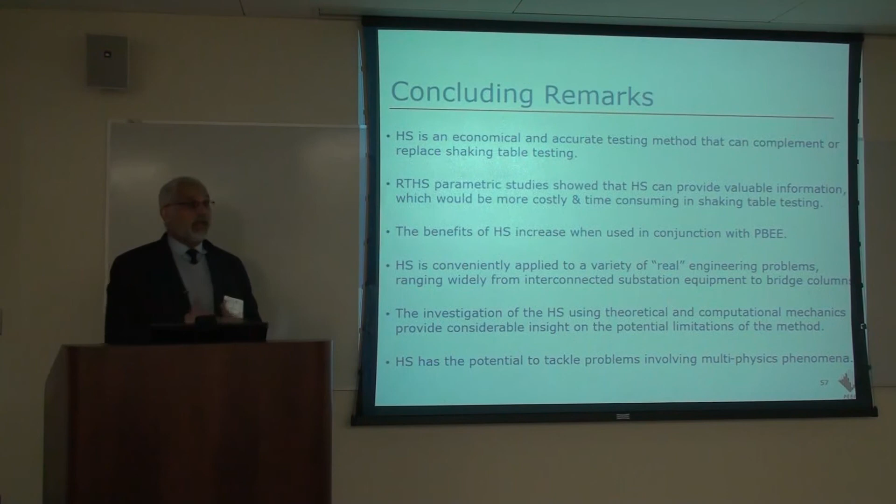There is a theoretical foundation that we should look at when it comes to hybrid simulation. We just scratched the surface, and there is a high potential of hybrid simulation to tackle other types of physics, not just dynamics or not just earthquake loading.

So I will stop here, and sorry for going a little over time. And I'll be happy to answer any quick questions, or we can leave that to the panel. We're good on time. Yeah. We're good on time, so you can answer.

Yeah. So sorry for going too fast, but you're going to see the details throughout the 2 days, because there will be many presentations that will talk about the time delay. Salim will talk about that. We'll talk about OpenFresco. We'll talk about maybe computational, or maybe OpenFresco Express, or so many other things that I didn't go in depth in.